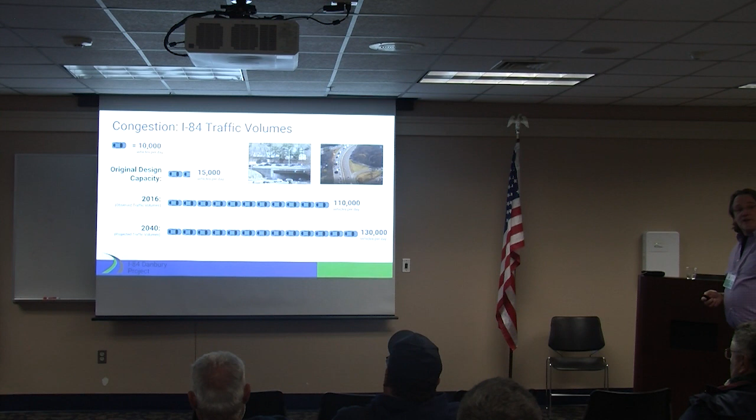The thing we want to point out is that in 2018, a needs and deficiencies report was completed that defined some of the issues on the I-84 corridor, and there's more than usual congestion. In fact, the original design capacity was for 15,000 vehicles per day. In 2016, there was 110,000, and in 2040 it's expected to be over 130,000 vehicles per day.

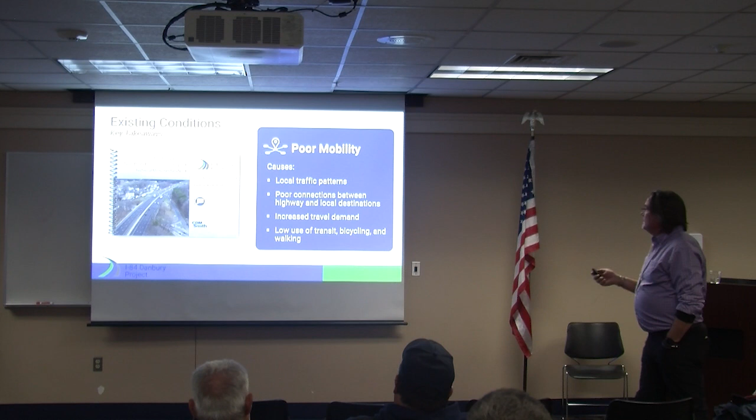So all of us who drive this kind of understand it's congestion. The needs and deficiencies report also pointed out that there's a lot of poor mobility, that's the movement of people and goods, especially poor connections between the highway and local destinations like the hospital or downtown. Those points were taken into consideration when the study began.

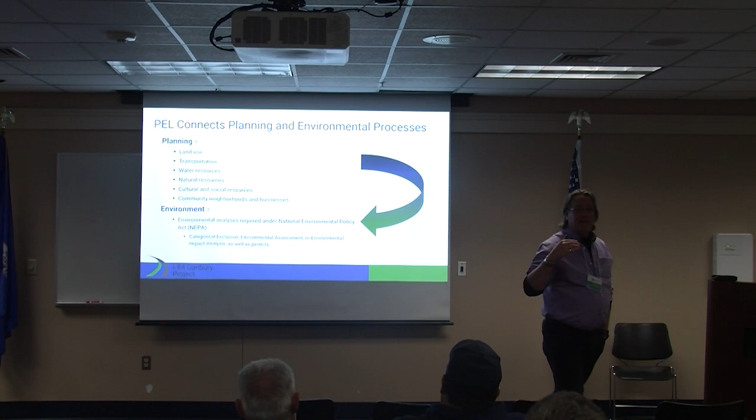PEL stands for Planning and Environment Linkages. It's intended to link all of the planning studies that have been done: land use planning, municipal and regional transportation plans, conservation plans, land and water use plans.

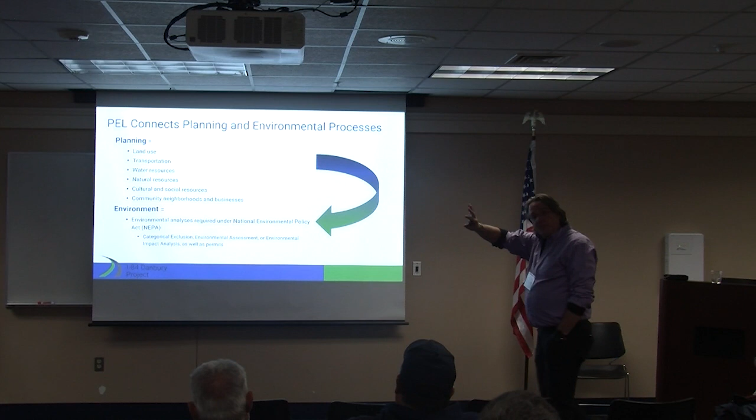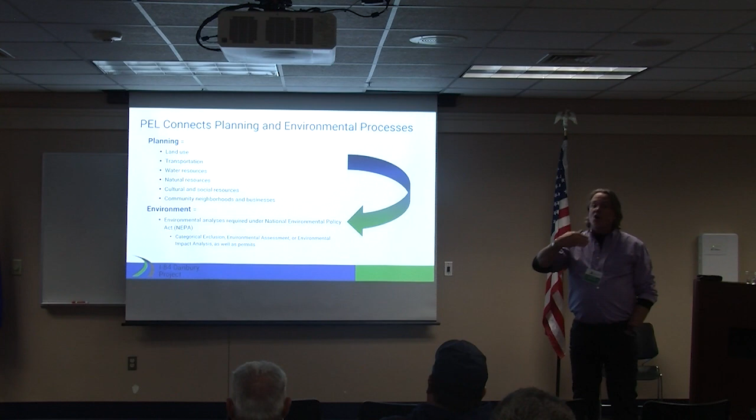All the planning that's been done is taken into account when it moves into a project-based study—this is not a project yet, this is a study—to take all of those planning issues and bring them forward into the National Environmental Policy Act, the more detailed environmental process, once we start a design process.

So this is based on the federal highways PEL process, and we've got a slide in the back showing that there's a lot of benefits to doing a PEL. The PEL will take all of these planning organizations and planning products and integrate them before it goes into the more detailed environmental analysis.

We've identified the transportation issues, needs and deficiencies, and prioritized what those issues are. Really, here is where we want your input. We're highlighting environmental and community concerns in order to create a roadmap to a project, and we hope these early action projects, these quick wins, these breakout projects can be implemented.

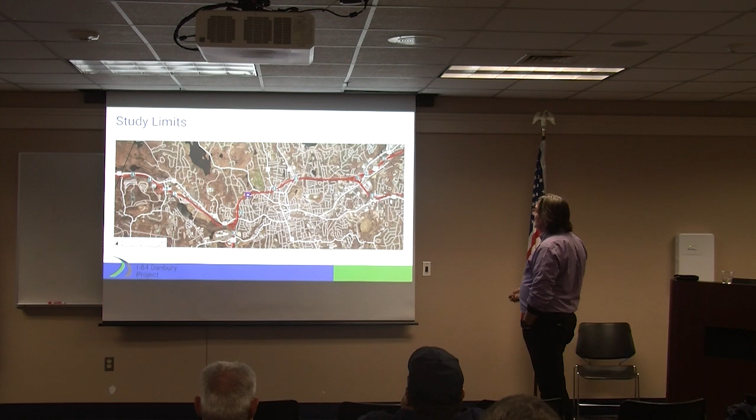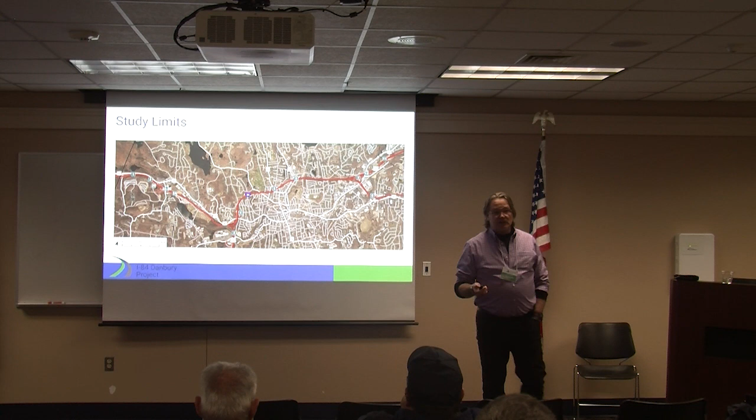Our study limits run from the New York border up to past exit 7 into 8. We know this whole corridor is very complex, with issues that are specific to localized areas, so we did not want to look at the whole thing as only one potential solution.

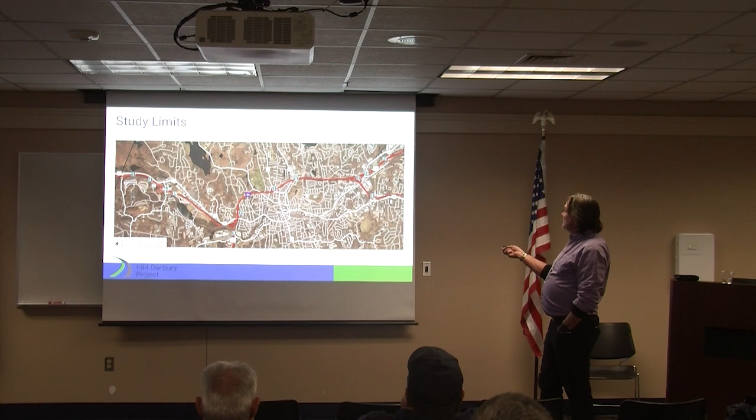We looked at the main line, which is why we broke it into segments. Over here in the west, where 7 comes in, there are very specific left-hand ramps and specific issues. In the center, there's access to and from I-84 from local roads, access to downtown Danbury, and access to the hospital. We've got places where we don't have complete interchanges—you can only get on in one direction.

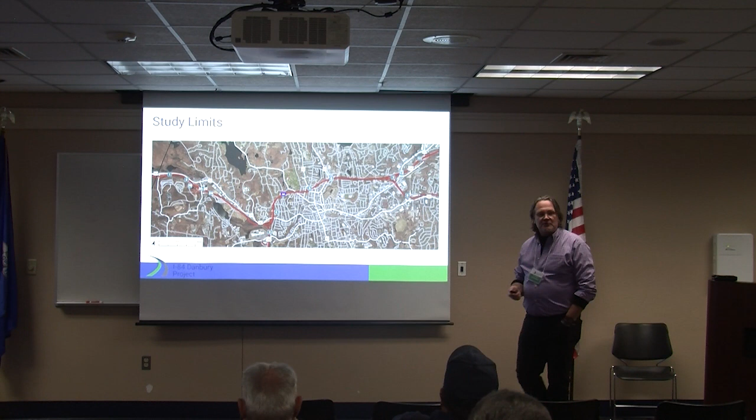So those are complex issues, and then we had another set of issues over here—the humpback or turtleback—as well as again the left-hand ramps where 7 comes in and out. Because of that analysis, we broke it into a mainline segment.

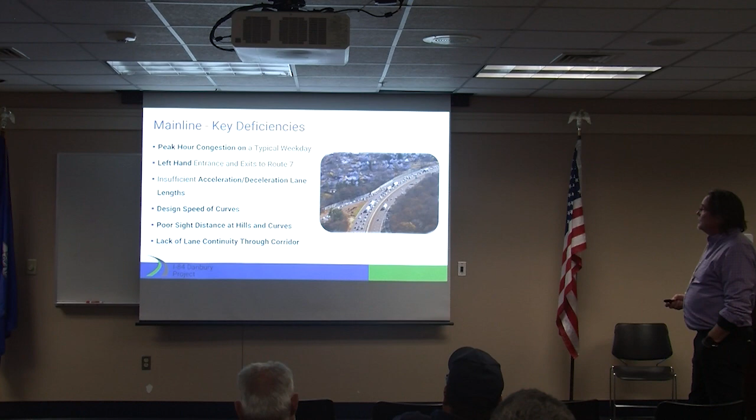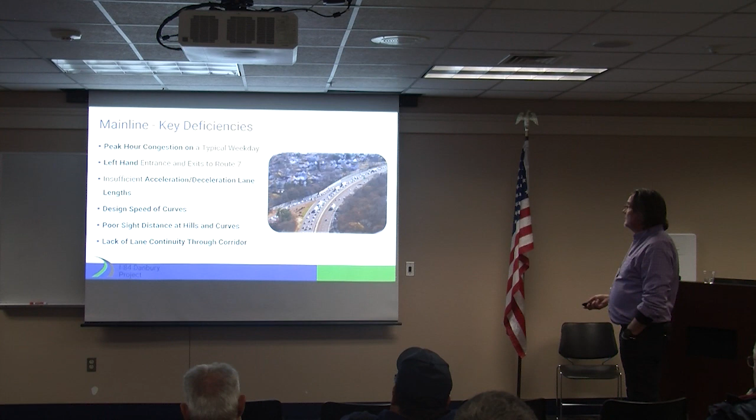The mainline segment has some very key deficiencies. We've got peak hour congestion, left-hand entrances and exits, a lot of very short throat acceleration and deceleration lanes, and curves that change our drive speed because they have a lower design speed than the straightaways. So we don't have consistency of traffic flow. We have poor sight distance at both hills and around curves that slow the traffic, and this lack of lane continuity through the entire corridor.

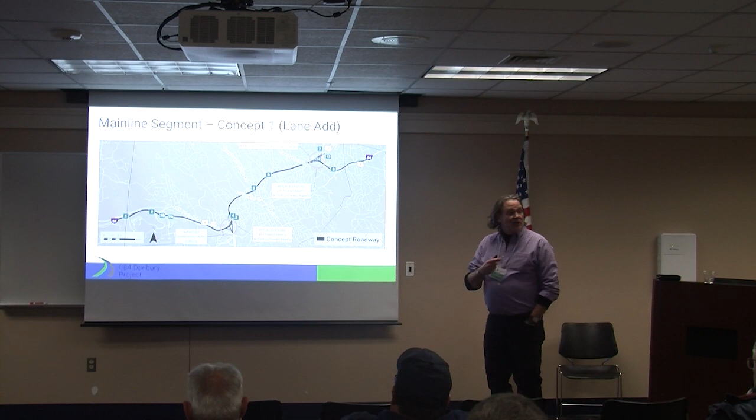So we're going to ask Sharat to explain some of the concepts that have been put forward to solve some of those key deficiencies. Thanks, Ray.

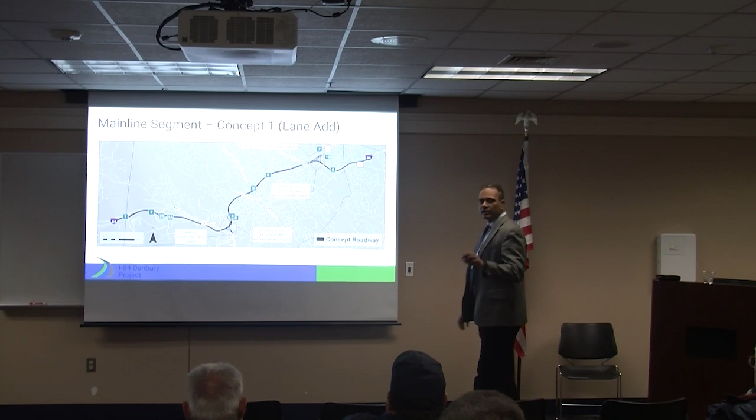If you went through the boards, there are three mainline concepts we're looking at. Concept one is the lane add, which provides an additional lane for the entire stretch from the New York line on 84 to exit 8. Wherever you see lanes adding or dropping, that would no longer be part of this concept—you would have 3 lanes continuously all the way to Hartford or all the way to New York. In some places you see exit-only coming up, and near exit 4 you see a lane drop happening when route 7 comes on. That's part of the lane add.

The other thing is the 84/7 interchanges. Those left-hand entrances and exits would be switched over to the right-hand side. So everyone wanting to go to Route 7 now would have to exit on the right side, not the left side. That eliminates a lot of what we call a weaving issue, where traffic is trying to cross and conflicting.

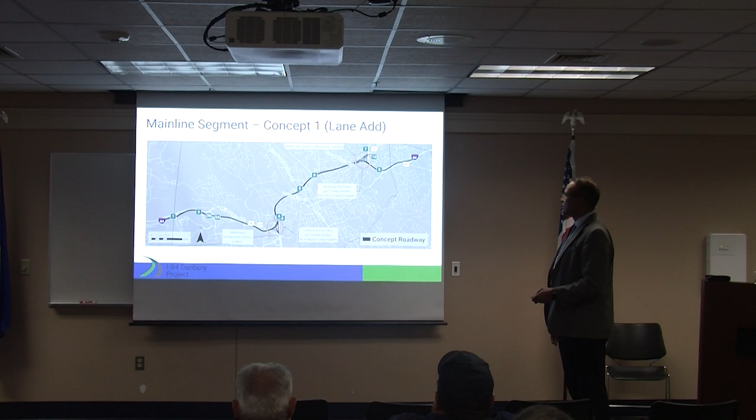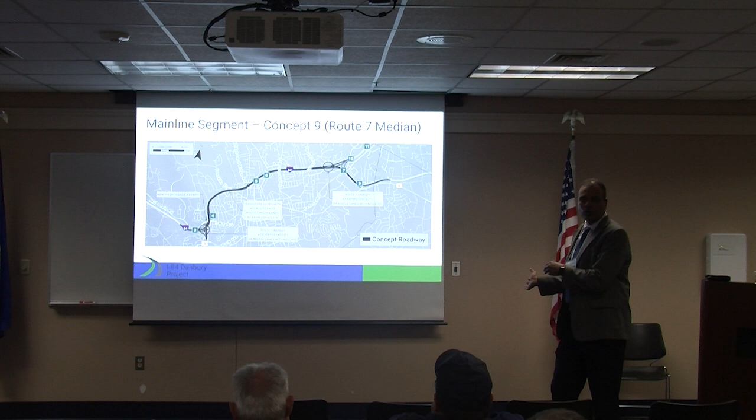So that's part of concept 1. The next one that was looked at was concept 9. I'm not sure how many of you went to the website, but this concept is similar to concept 1, except it looks at providing express access from 7 to 7. So we would put 7 in the median. There would be a flyover on 7 giving you the option of either staying on the right to exit to Lake Avenue or going to the downtown exits. If you miss that exit, you're all the way to exit 7. So basically it would be an express facility all the way towards New Milford and Brookfield. There's no way to get to a local exit then. So this is the concept for concept 9.

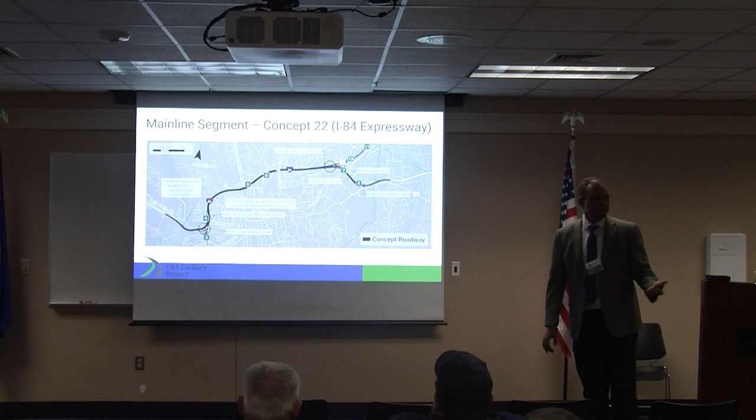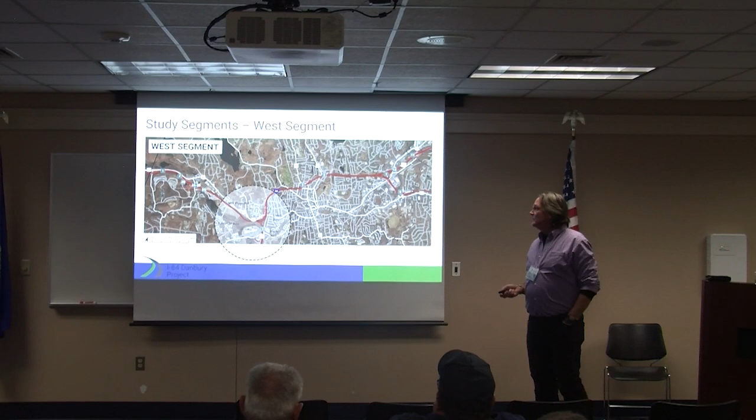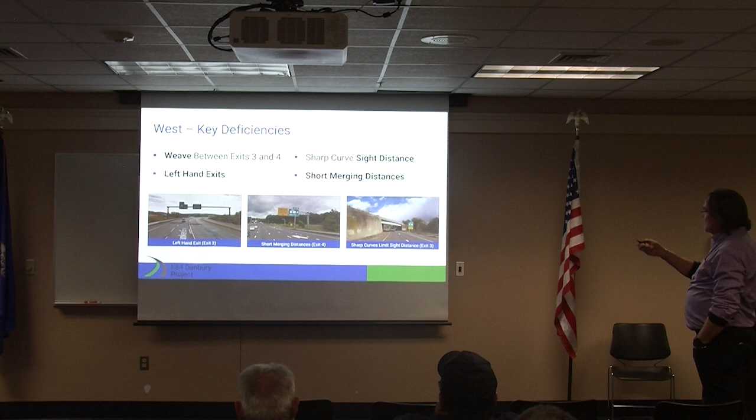So you can already get the idea of what we're doing. Now we'll look at the same kind of process for our west segment. Some of the key deficiencies again are those left-hand exits, the big weave that Sharat was talking about. If you have to move over 3 or 4 lanes to maintain your direction of flow, and somebody else is moving over 3 or 4 lanes the other direction, that's what we refer to as a weave. And throughout this area, we've got sharp curves and short merging distances.

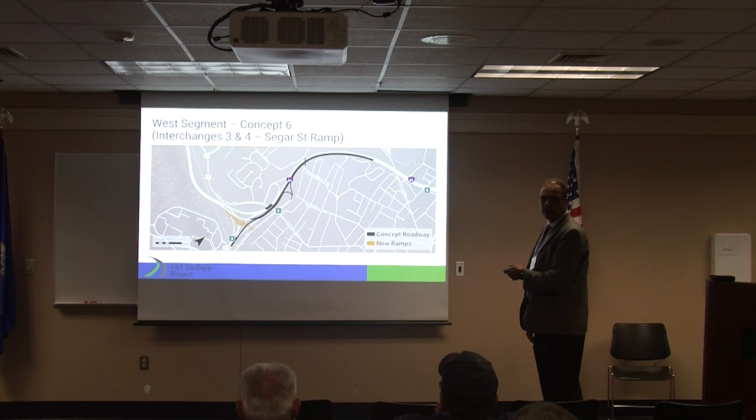So, two concepts in the west, called concept 6 and 12. Concept 6 is what we're calling the Segar Street ramp. This was looked at initially because 84 traffic wants to get to Lake Avenue, and you've probably seen this happen a lot where traffic just stops right at this ramp, especially because 7 traffic is coming on, trying to merge, while 84 traffic is trying to cut across to Lake Avenue. There's a mess here, backed up all the way down to the New York line. So the idea was to provide a ramp down to Segar, allowing 84 traffic to exit on Segar Street, with a barrier provided so 84 traffic no longer can take Lake Avenue. Only the 7 traffic that comes on can take Lake Avenue. So we split the Lake Avenue traffic between 84 and Segar Street. One of the other things we do here is put a little bit of a curve on 7 to slow it down as it comes in.

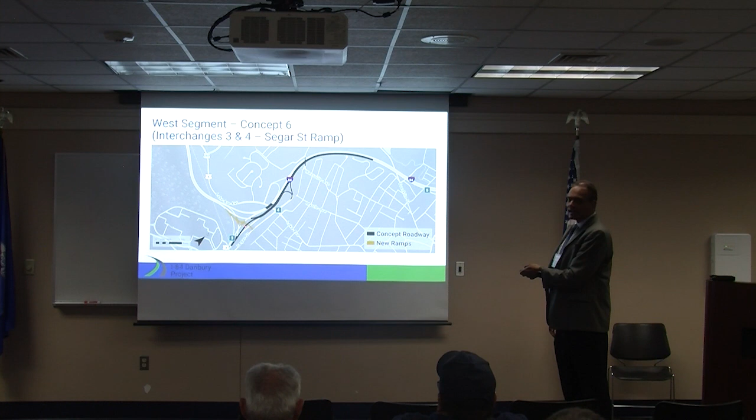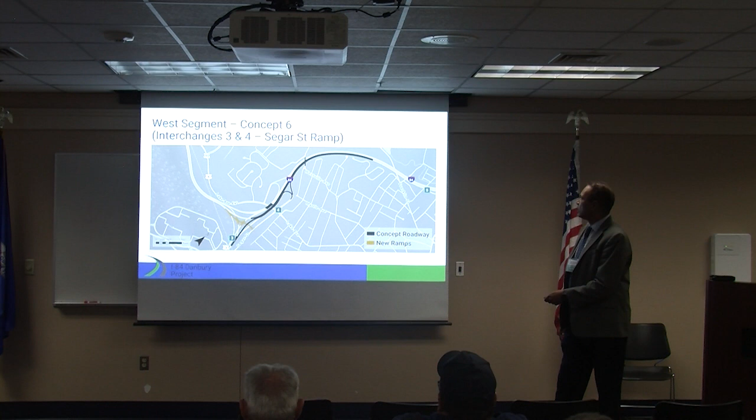If you travel it, 7 comes in at pretty high speed onto 84 today because it's got a straight shot, and you can see from this white line, which represents the existing 7. By doing this, we allow this merge to be much easier than today, and allow that 7 traffic to better mix with the ramp traffic. The other concept you looked at was concept 12. We don't do the Segar Street anymore, but anyone who wants to get to Lake Avenue, we put them on this green road called the CD road.

You probably got fed up hearing about CD road, but it's essentially a roadway that parallels a highway, an express facility. We put traffic there, and that's where 7 traffic would come in, creating some conflicts with that and Lake Avenue traffic. But 84 wouldn't have issues because 84 traffic going to Lake Avenue would be on this green road, not trying to cut across to Lake Avenue.

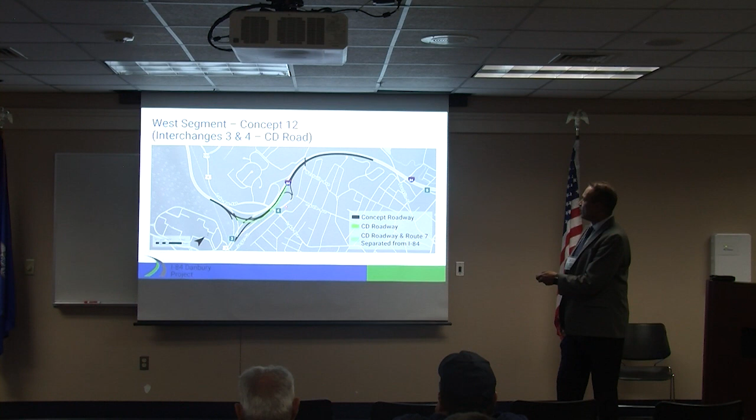So those are the two that are in play, mainly looked at on the west side to address the issue between 3 and 4. Keep in mind, as part of concept 1, 9 and 22, the left-hand to right-hand ramps are part of that larger project, so in these smaller interchange area concepts, we're not looking at switching ramps.

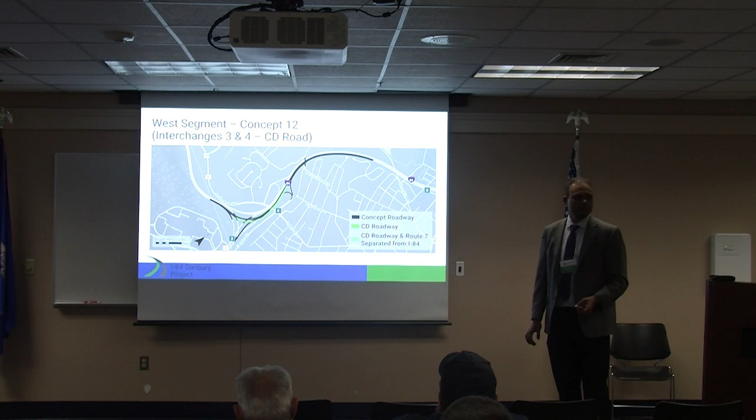They're already part of the larger lane add option. To clarify, since you'll hear the word CD again, it stands for collector distributor. So you have mainline traffic flowing through, and an adjacent highway that takes all the on-ramps and off-ramps, collecting and distributing all the traffic, which then eventually joins back in.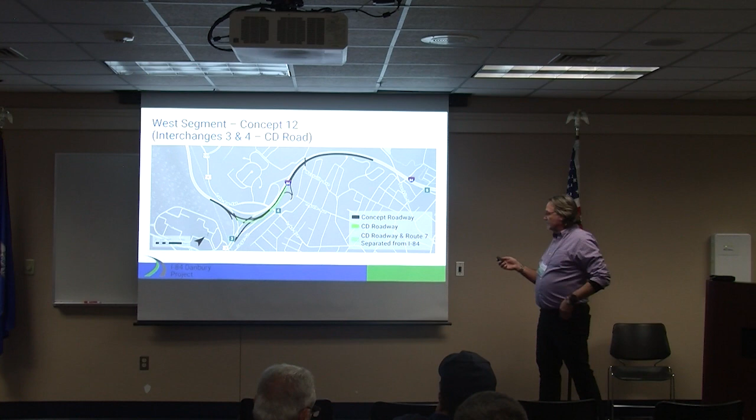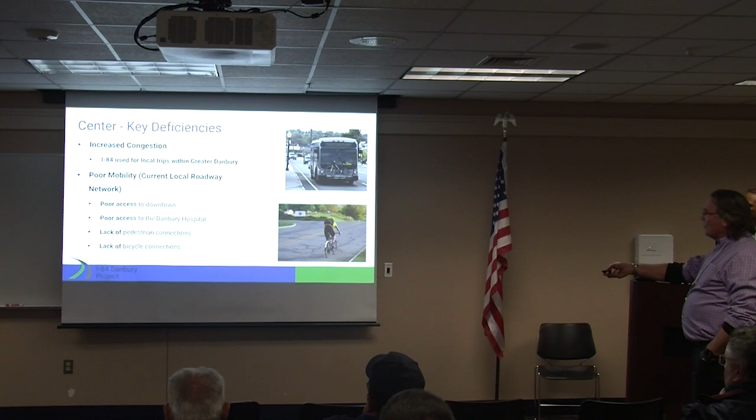It's meant to take all of those on and off-ramps off the main line. Then we also have the center segment, and the main deficiencies were more about increased congestion—there's still congestion throughout the center section—but a lot of it was poor mobility, poor access to local roadways, and poor access to downtown and destination locations like Danbury Hospital.

So Center had 4 concepts, and I'm not sure if you've seen all four concepts. There are several concepts that were not moved forward, and there's a board here showing which ones will move forward. But this one is called the Hospital Access Tamarack Avenue.

When we started the study, there were a few concerns from stakeholders looking at the needs and deficiencies—poor connection to downtown, poor connection to the hospital. So a lot of these concepts were looking at addressing hospital access and downtown access. Many of you know that exit 6 today is a partial interchange—you can only exit or enter from the east. You cannot get to North Street to and from the west.

So the whole idea was to create a new interchange here at Tamarack Avenue, which would be a full interchange. The issue is obviously North Street—these existing ramps would have to be removed. Anyone who wants to use North Street would have to use Hayestown or other ways to get there. That's a downside, but it certainly provides a direct connection to the hospital campus.

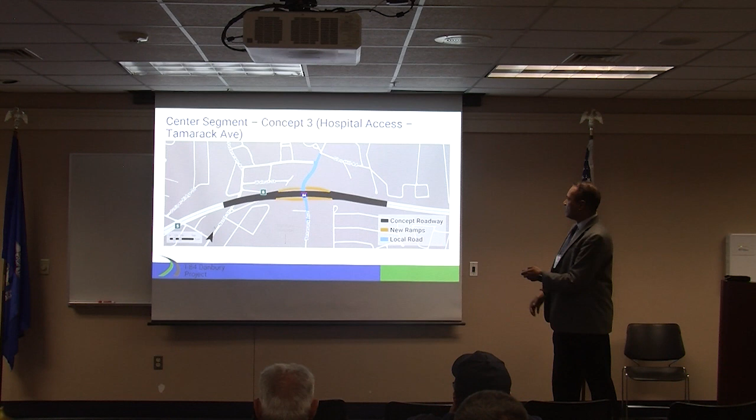Concept 13 was looked at as something that could be done probably sooner and easier—leave the existing ramps on North Street, but provide a new ramp going to and from the west at Great Plain. This would provide that connection to the hospital through Great Plain, since Great Plain turns into Locust, which goes into the hospital. So that was also looked at: keep the existing exit 6 ramp, provide new ramps at Great Plain.

The only downside is you split the two entrances—you basically have one side on North Street, the other side on Great Plain. A lot of drivers don't recognize that, and it creates confusion.

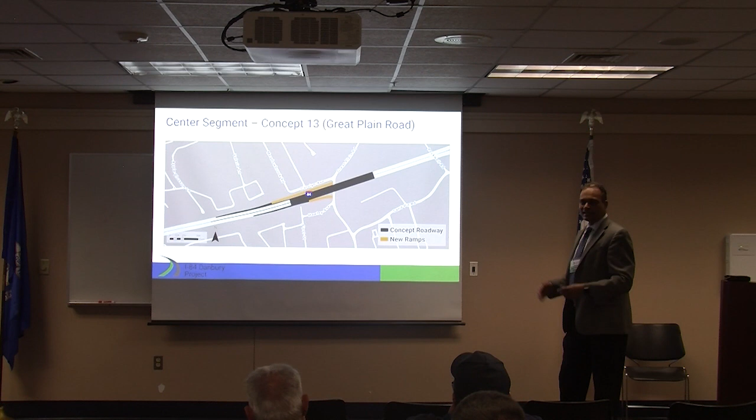Concept 16, probably the most impactful of the four, was to look at providing that ramp from North Street somehow. Here in green, going back to that CD road concept, it would be a very short spur on both the north and south sides, connecting North and Tamarack. The idea would be to pull traffic from both roads onto the CD road, which would then feed the ramps going in each direction.

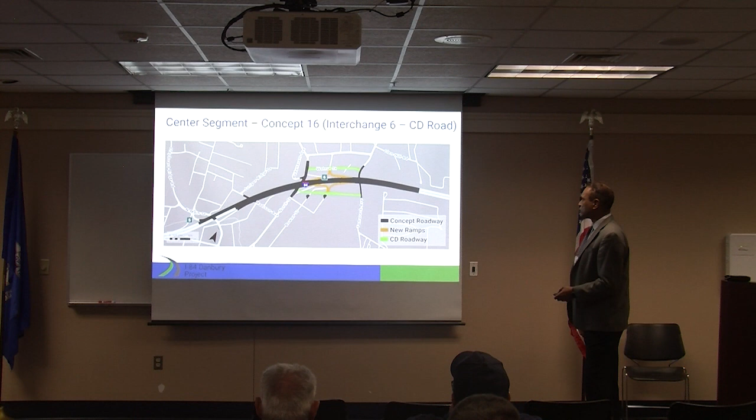The south side creates a lot more impacts—that's Wooster Cemetery here, kind of their property, so this road would tie in there. There are more impacts with these ramps being quite short because they're very close to the highway, so this had a bit more impact. Then concept 26 was the last, numbered from the sequence, and this came about through more discussions with the city to provide a full connection on North Street, full access to North Street.

So in the westbound direction, this ramp would be the new ramp added to get onto 84, allowing traffic from North Street to access it. Eastbound, we could not put the on-ramp from Main Street and the off-ramp to North Street close to each other, so we created this green road, called the CD road. You'll still be able to use the CD road to get to North Street, but it won't be a direct connection from 84.

So now we are providing a full connection at North Street, which is more favorable to businesses and direct access. People use North Street quite a bit. The only concern is that the interchange gets very close to Main and North Street. This is the reason why for so many years you never saw an on and off ramp at North Street - because of the proximity.

Again, this is one of the things we are evaluating as part of all four concepts and looking at how they work against each other.

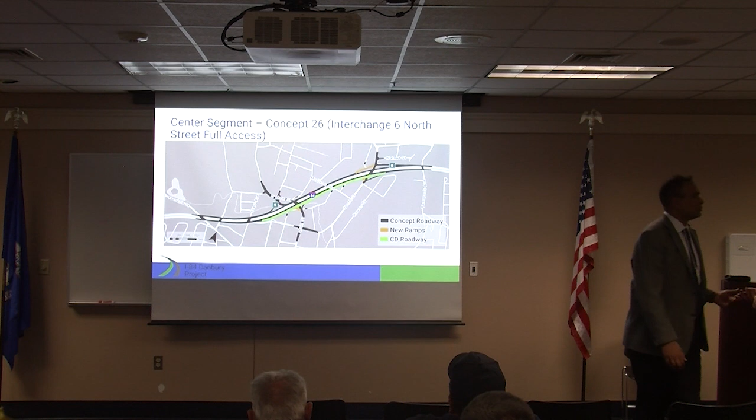So now we're going to look at the east segment. We can see there were weaves between the two exits and the left-hand exits. So we are looking at potential concepts to solve some of those problems.

Two concepts on the east, number 14 and 15, happen to be back to back. Here we're trying to do a couple of things. We've already switched the ramps in the main line concept on the right side. As you're going eastbound on 84 today, you make an exit to your left to go to 7 north. This way we put the exit on the right. You take this CD road, and there would be a slip ramp to go to 7 north.

You can stay on this green road and get off at Newtown Road - you never have to get back onto 84 to reach Newtown Road. Once you make that exit, you're going to Newtown Road. You also have the option to go back on 84 if you need to, via a small slip ramp here.

The other problem today is the 7 south traffic that wants to get to Newtown Road, because Federal Road, as most of you know, is too dangerous. So what we did is pull that ramp onto the right side, put it on the green road, and then they would be able to get to Newtown Road, or if they want to get to 7 from 84, they could use the slip ramp to get back on eastbound.

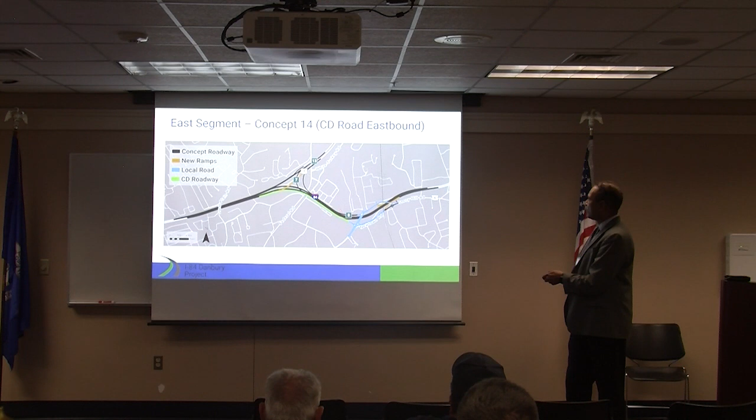If you want to get to 84, you can stay on the CD road, and that CD road would tie back onto 84 here. So the benefit of 15 is what you don't see in 14 is this so-called crisscrossing of traffic that happens a lot in 14. We would get rid of that in 15, because 84 here in the westbound direction also doesn't have that anymore, because all of that crisscrossing is going on that CD road.

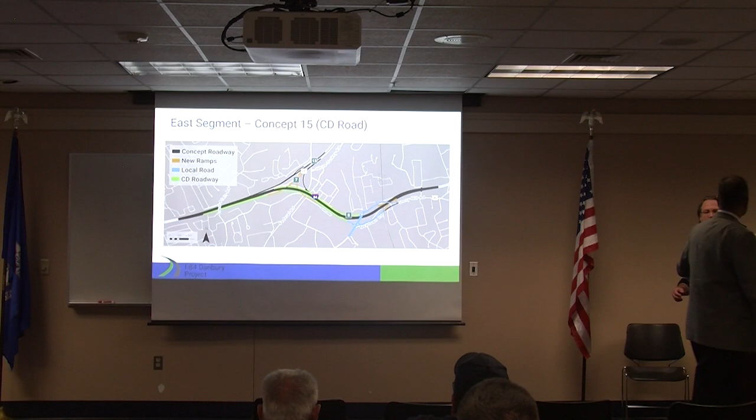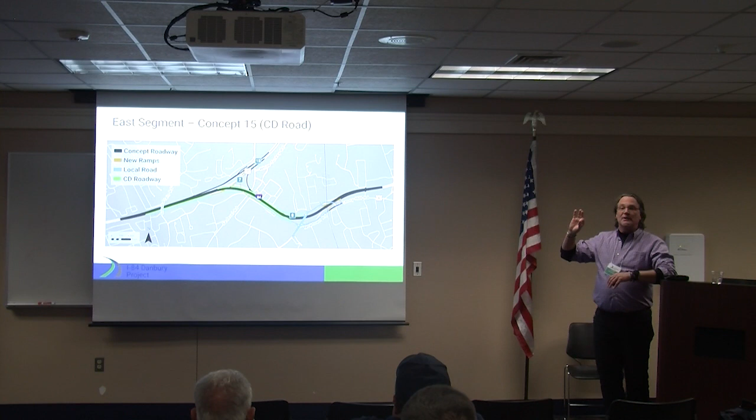So we want Sharat to continue on here, but I'd like to take a pause for a second and remind us that we're at this conceptual study level with these concepts that have been brought forward and vetted and designed to a degree that we can see if they function or not. And then we're trying to figure out which of these concepts, by segment, have a better use, solve the congestion and mobility problems better, or have less impact to the built or natural communities, right? So that's kind of where we're going. But these are just the potential highway options that we've presented so far.

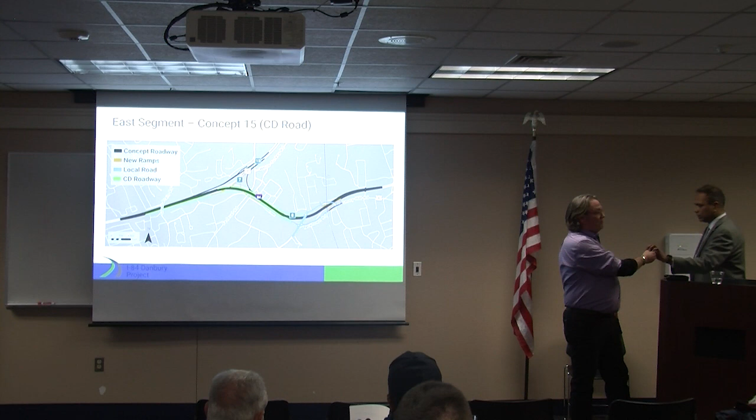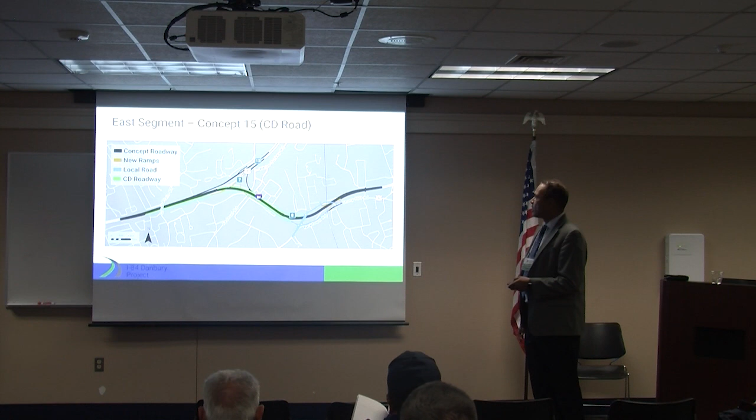Sharat, I'm going to ask you to continue on with your dynamic lane use and some of those. Sure, but I want everybody to realize where we are in the study and keep that in mind. So some of these that you're seeing here are kind of more long-term, larger projects, requiring a lot more design and planning work. So what we started to look at are some of the things that could be implemented on a much shorter term, what's called dynamic lane use.

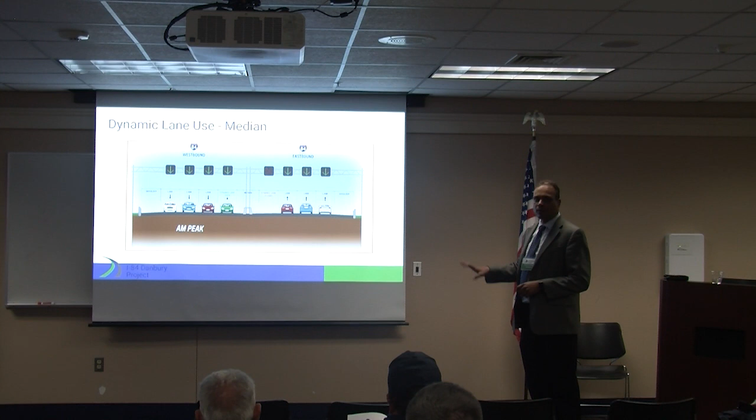And some of you, I know, visited this board here. So the idea, I go back to the Tappan Zee example, because most of you have probably driven the Tappan Zee. It's not exactly like Tappan Zee, but the concept is similar to it. They kind of use this in the Midwest quite a bit. So the idea here is to maximize the existing roadway that's available, maximize the width of the roadway in each direction that's available for travel. How can we fit an additional lane without having to widen? We may have to widen, but we're still investigating it.

The idea is to get a 4th lane on the left side. So the left shoulder today is about 10 feet wide. We certainly couldn't get a full lane in there, because we've got to keep a certain amount of shoulder. We would try to work with the existing lanes, try to get at least a 2-foot shoulder, and put a lane in there. The issue, and we get this question all the time, is: oh, you're already adding a 4th lane, why don't you keep it 24/7? The problem is we have a 2-foot shoulder. It's not great, especially during times when you have an accident or any kind of issue, or even maintenance is a big concern.

I know we talked to the gentleman in the back about snow removal, taking debris out, things like that. Certainly that lane would only be used in times when it's needed. So in this case, in the morning, for example, we would be using the lane in the direction that it's needed, which is going into New York. In the evening, we would be using it in the eastbound direction, coming in towards Hartford. In the middle of the day, that lane would be shut because we really don't need it.

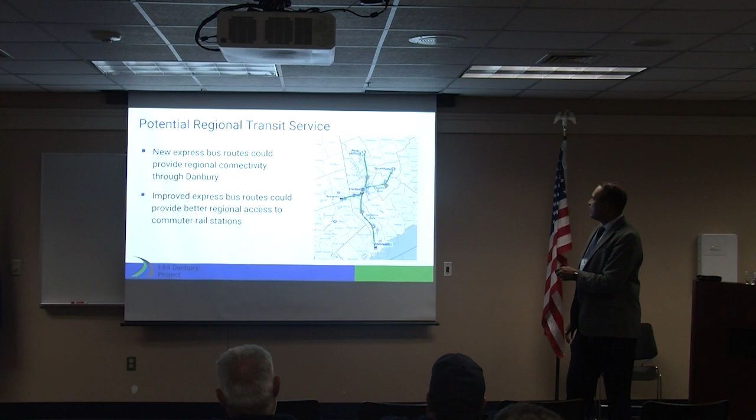One of the things we looked at was a high-level transit analysis, and we noticed that a lot of the people within the Danbury area who use 84 are living within this orange belt, as far as Southbury to the east and New Milford to the north, with New Milford folks mainly going to New York, Brewster, or Norwalk.

Southbury folks are going to Brewster. In fact, there are a lot of people who live in Southbury who take a bus sometimes to go to Brewster, get on the Harlem line, and get to New York. They don't want to go to Norwalk, they go to Brewster.

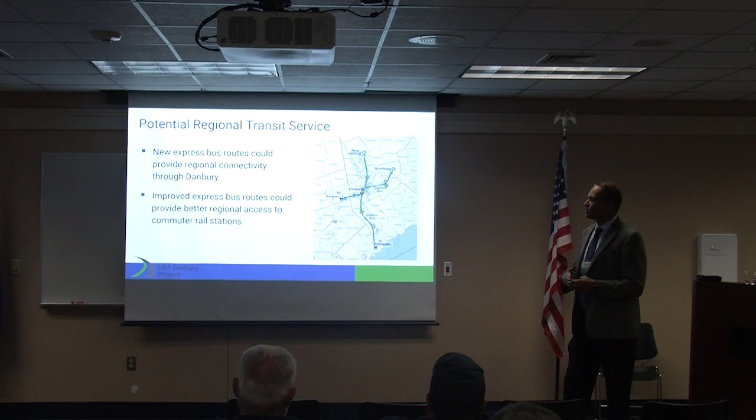So establishing these regional connections certainly would give us an additional mobility option. It wouldn't take a bunch of people off the highway, but it gives them an opportunity to use the bus, an express bus that would get them to Brewster, or connect to Norwalk. These are opportunities that need to be studied further and documented as part of the PEL process, to show there are options available on a regional basis.

In addition, we feel there need to be some potential changes made to the local service. There's a lot of buses now that HART operates that do a great job trying to connect as much as possible between different services. Most of these buses come to one location today, downtown near Kennedy Park, and you kind of have to switch over. There's a pulse point there.

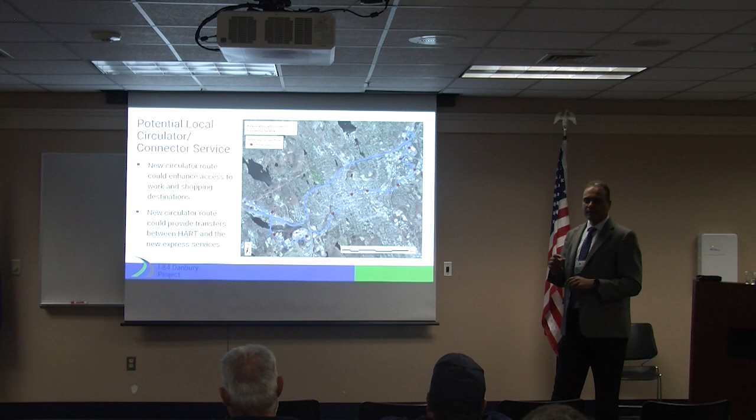They're trying to move that pulse point to the rail station. This circulator service would give people the opportunity to not use a connection that requires switching over or transferring. It would allow them to go from east to west. So if you're living in Brookfield, like in the Federal Road area, and want to get to the mall, you could use this service without transferring or waiting for the next bus.

You can also stop at one of the pulse points and then switch over to another bus. A little bit more service planning needs to be done, but it's an idea of how people could transfer between local service, or even transfer between this and the express service shown in the previous slide. This would have to be worked out in more detail in terms of exact timings and frequencies of the buses.

In addition to the bus, most of you have probably heard about the Danbury line, Danbury to Brewster line, which is the existing rail bed owned by the Housatonic Railroad. Putnam County did a study to look at that potential connection to provide a 10 to 12 minute service from Danbury to Brewster, mainly because a lot of folks take their single-occupant cars to drive over to the Harlem line, park at Harlem line stations where there's not enough parking, and try to get to the Harlem line to reach New York City.

So the idea here is to look at this rail connection to see if there's a way, without having them switch trains in Brewster, to have this train make a U-turn and go all the way down to New York City as a potential option. This is something that's being studied already as part of that other project. We wanted to recognize that this is something in play that's being looked at by both Danbury and Putnam County. What's the status of that?

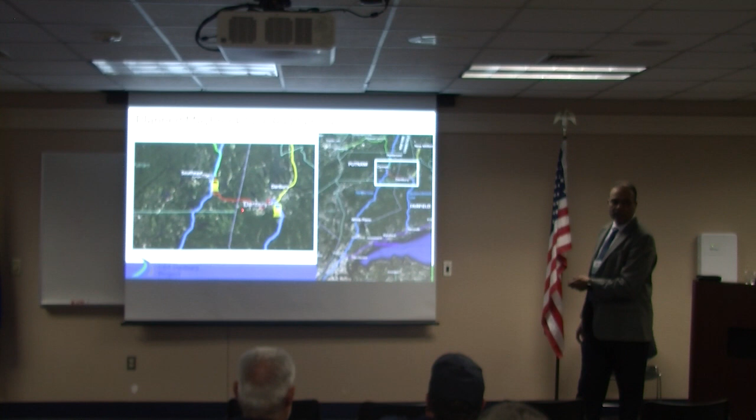And I think they're introducing two additional stations between Danbury and Brewster on the Connecticut side, so there'll be two stops before they get to the city. I think there's one near River Street, exit 1, where there's a condo complex, and there's one near where Union Carbide used to be—Rivington. So there are two stops there.

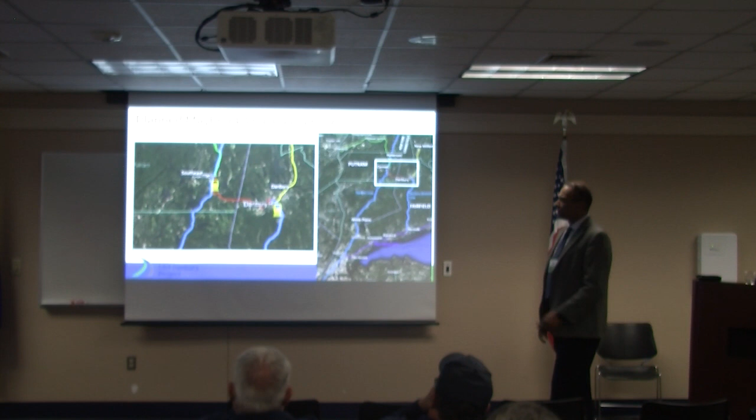And then in addition to the transit, we also looked at—this is hard to see—we went from the New York line all the way to exit 8 and started to explore opportunities where bicycles could be accommodated. Certainly right now, if you look at any of the streets in Danbury, there's probably very low bicyclist use. A lot of that is because of the grade and terrain, and a lot is because of traffic volume, especially downtown on Main Street and North Street, where it's very hard to ride your bike with the north-south volumes.

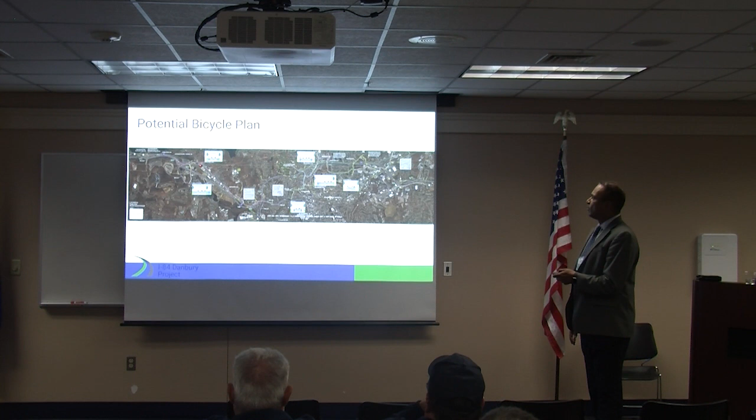But there are some ideas for how bicycle facilities could be accommodated. We don't see all of these coming up at the same time, but these are ideas that could be more improvised—maybe a small spur starts and then the next one. The city is also looking at potential trail connections which are off-road, and those could be implemented probably much quicker since there's more offline work involved. The trail connections would tie in well with any on-road bicycle facility. So this is something we've given the city for review, and we'll be incorporating some of these ideas into the PEL report as part of our study.

In addition to some of the projects like the lane use I talked about, the department is currently looking at installing cameras along 84, like you probably see on 95. There will be cameras you can log onto the DOT website and see traffic conditions and things like that. They're also going to install what's called variable message signs—the VMS signs, large signs that would tell you Hartford 30 miles, 20 minutes, or 25 minutes, giving more driver information. That's part of a program the department is already moving forward with.

We're also working with the city on looking at some of the traffic lights to see if they could be better timed, in some of these places where the traffic backs up quite a bit.

The city has a plan to look at something on Main Street and Down Street, potentially converting Down Street to one-way. So there's some ideas at the local level that we're working with the city on, and we talked about that exit 8 area with the diverging diamond, the ramp on the left side.

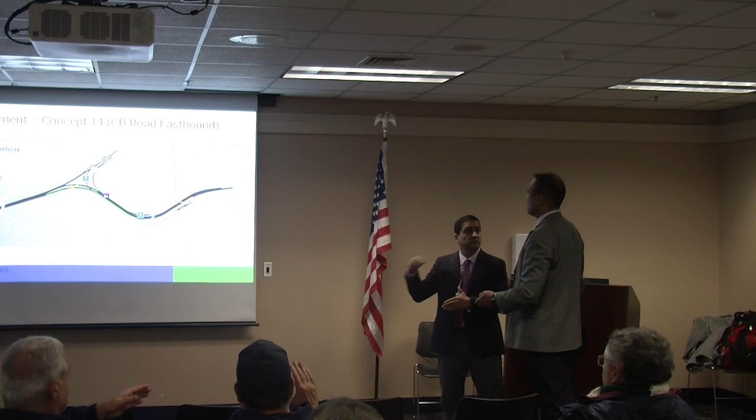Did any of these concepts address the eastbound exit 5, going down the street over to Clapboard Ridge Road? I don't know if I saw any of these. Not direct, I mean concept 26, which the city recommended, had... are you talking eastbound exit 5? Exit 5 eastbound, going down to the traffic light at Main Street, making a left to go up Clapboard Ridge Road. Yeah, so this is the only one that looks a little bit more like it.

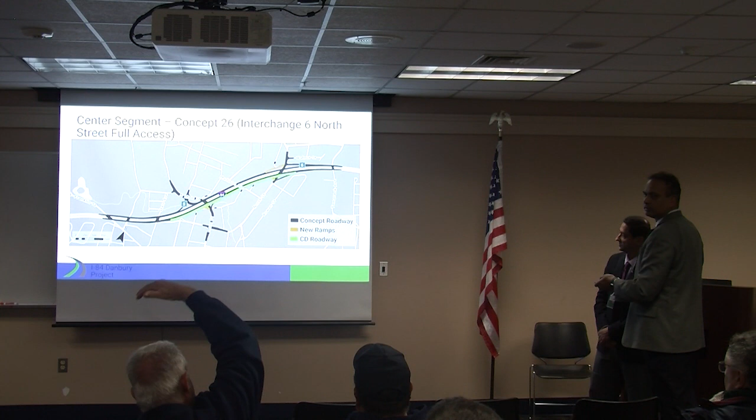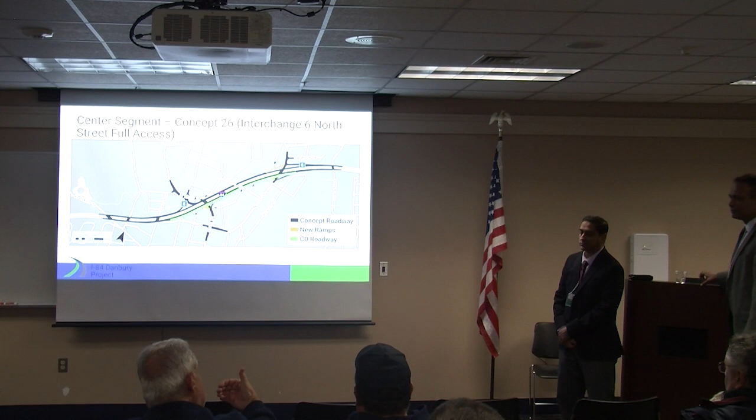So there's the city, no exit 5 with a ramp going across the highway right there to Clapboard Ridge, without avoiding going down to Main Street. Yeah, so you'd still have the westbound access though. He's talking about eastbound. Eastbound, yeah, because all the traffic going to North Street gets off at 5, all the traffic going up Clapboard Ridge Road gets off at 5, and they have to go down to Main Street, make a left, to go underneath the highway. That would be the same case in all of them. Okay, there's no flyovers or anything. No, the problem is we can't grade separate here because the elevations don't work well to allow that to happen. He's talking about getting to Clapboard Ridge, you have to make a left whether you make it here or there. A lot of people get off exit 5 there, and a lot of people from Fairfield make that left out to North Main Street, go up Clapboard Ridge, or they go up Golden Hill, and it goes over to 39, because you don't have a ramp here now. You don't have the eastbound ramp here, right? They use this and kind of go up this way.

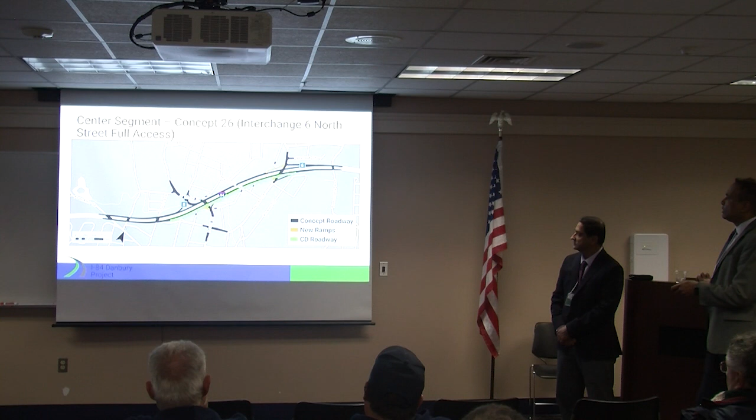If you add this North Street connection, a lot of those people who go through Golden Hill and then off have right to there too. Is that off over right there? Yeah, up north, so.

That was a concern the city voiced, in terms of Golden Hill, about Downs Street, possibly making it a one-way going down only. Yeah, so there's some ideas the city had in terms of making this piece of Downs one-way, because the other direction doesn't have a lot of traffic.

Going up the hill around the circle? Yeah, basically, if you have this ramp, you would just make this one-way all the way up to Main. Most people would hate that, you know, one-way traffic.

3 lanes? There's not a lot. You could still get up there, there's other streets here, you could get up. There's not an issue that way. But it takes away a lot of pressure on this traffic light.

We also got consensus with the city about 2 lanes turn left and 2 lanes. That's one of the intersections that we're gonna look at, maybe even as a breakout, try and improve that, so you get some temporary benefit, at least in this area.

They also talked about the sight line as you come down Main Street, you can't see the cemetery, because there's a wall around that corner. So that's something that we're gonna look at, whether there's a quick fix for the alignment, the stopping, the traffic light. Yeah, I know. You had a question?

Supervisor, so if you do the short-term dynamic lane proposal, wouldn't that exacerbate the problems of this crossover traffic even more? I mean, now you have 4 lanes, but you still have all of this crisscross traffic at exit 4. The signage would really have to be clear in terms of that.

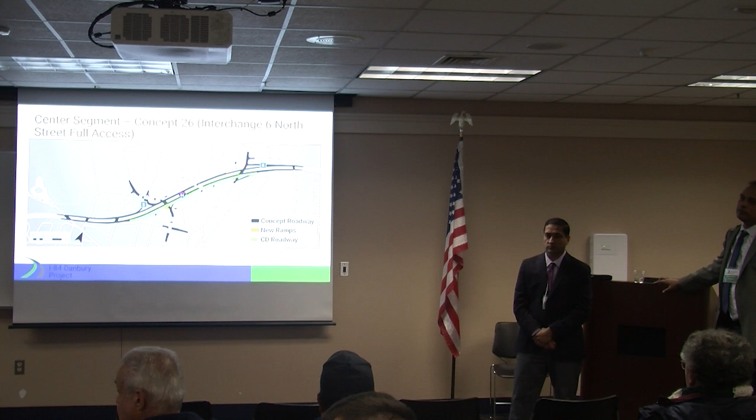And I'm just wondering how much actual, like, data-driven is this? Like, how many studies have gone into it to see where is the actual traffic, like, from Route 7, where do they wind up? Are they getting off exit 5, are they getting off exit 7? Are you actually tracking where the cars are going?

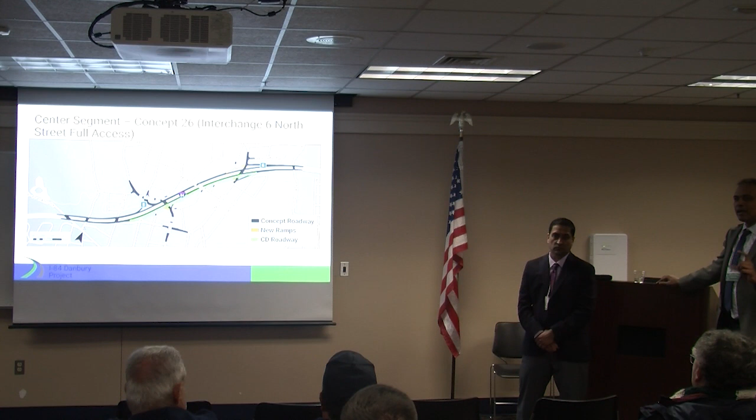Yeah, so we did an extensive data collection program back in '16, before COVID. We collected traffic volumes all through the corridor. We also looked at what's called origin destination, where people on 84 are coming from. We found that a third of the traffic on 84 is local traffic, people who live in Danbury and just use 84 to get around town. We found 7-to-7 traffic is about a third, and the 84-to-84 traffic is about 40% roughly. So there's an equal balance of those movements happening between 84-to-local and 7-to-7.

So certainly that was part of a lot of decisions you've been looking at, in terms of the whole collector-distributor road idea, was essentially to pull some of that local traffic onto that collector-distributor road, so we don't have to put the traffic on the main line. They should be on that collector-distributor road trying to get to a local road. So a lot of this analysis was based upon that data and trying to understand patterns of how people travel.

But even adding a CD road is not gonna take over additional land, you're gonna do it within the confines of where it is right now? No, basically this CD road, for example, we haven't really figured out how this would be in terms of elevation, but it's going to be pretty close butting against. We have retaining walls, which basically would not create property impact. So certainly we know this is a built-up neighborhood.

Concerns about that—this is one of the concepts, so we have 3 other concepts being looked at. Everything is going to be compared against each other to see how this fares against the other concepts. That's part of our evaluation: if we have 4 concepts that all perform similarly in terms of traffic, we start looking at how many impacts one has versus the other. Just hypothetically, if one option impacted 25 properties, and another alternative worked just as well but only impacted 2 or 3 properties, that's one of the considerations we'll be looking at.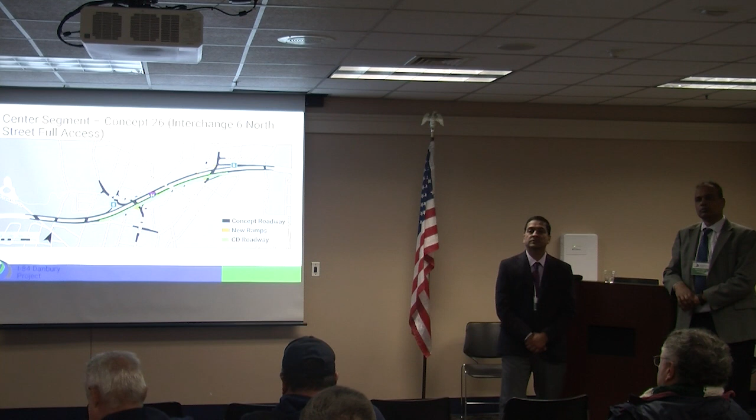Still disappointed that concept 10 wasn't part of the presentation.

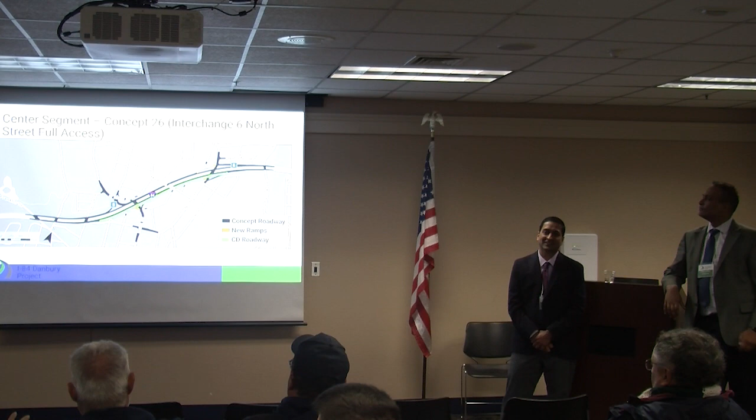For the exit 3, exit 4 area—one thought, I remember way back when there used to be an actual exit onto Kenosia Avenue, it was exit 2 back then. Was that considered, to perhaps bring that back to help relieve some of the volume going to either the mall area or to that part of Mill Plain Road?

So keeping the existing exit pointing out where it was, exactly where it was. To the west. You'd have to show it on the Kenosia map. The button wouldn't be on there yet. Maybe concept 1. Your left button will go back one. Use the right one. There you go. And the center one, oh, or you can turn it off. Thank you very much, good night.

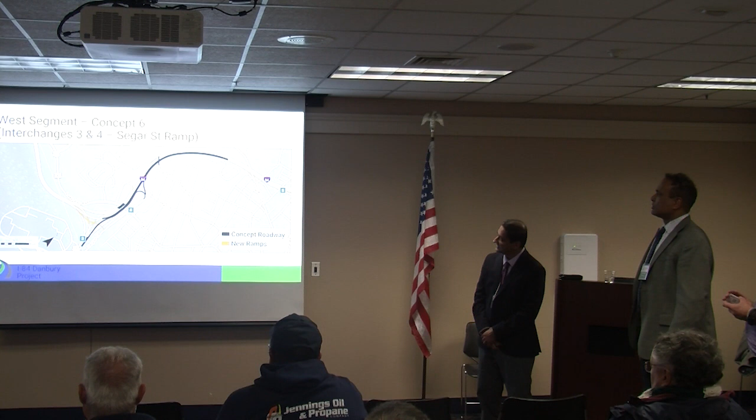Right, here was the exit. It would be further down, at the intersection of Kenosia. Here's the railroad track, further to the west. Further west, yes—here's the railroad tracks, and it came right up here, and it's all wetlands again, and went over to the mall right here—this is the mall. So it's back at the mall entrance. It would be further west, right here. I think Kenosia is further to the west, right?

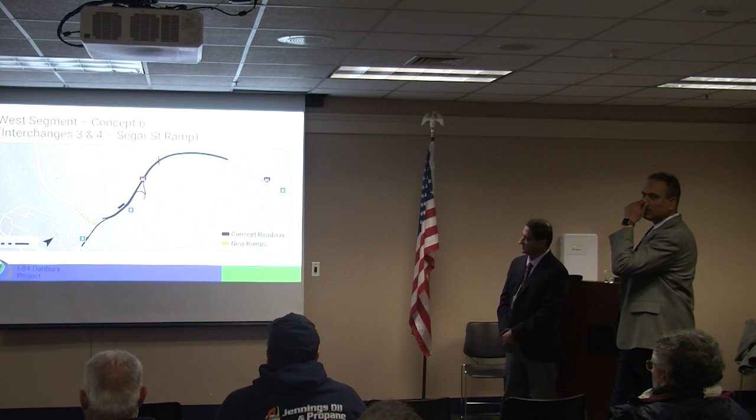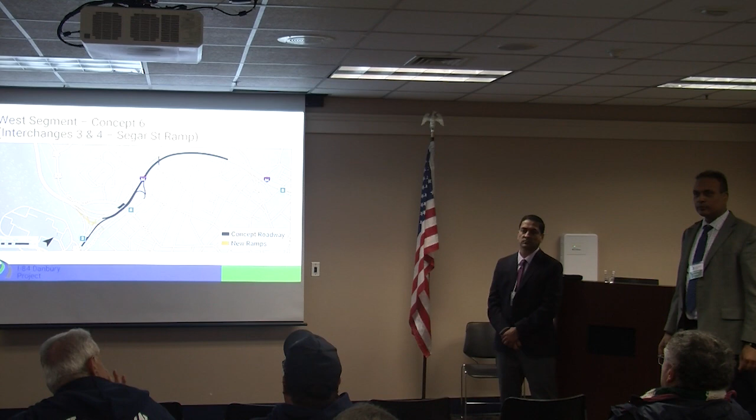It is, yeah. The issue I can see is that exit 2, Old Ridgebury Road, is very close to that Kenosia exit. Exit 2, Old Ridgebury Road exit—yes, I think it's very close. Not really, there used to be an existing one there. It was actually, way back when, exit 2. So you're talking about—that's a better map. When Union Carbide came in, they changed that all around, and that's where they put that exit 2 in. This is Kenosia—it actually used to be an exit that people used to go to the fair.

Yep, exactly. So I think, for whatever reason, a lot of the infrastructure is still there actually. You could resurrect that and maybe help use it for some of the volume going to the mall area, and also make a left onto that part of Mill Plain Road. Especially if you're considering that Segar Street exit, right? Because that Segar Street exit may help people go back into where exit 4 is. But there's a whole other part of Mill Plain Road that's getting congested enough as it is, which could probably use some help.

Yeah, we will have to look at this Kenosia exit, because we did not see any studies looking at this one per se. One concern would be that this kind of splits the exit, right in the middle of the two—we'd need to see how this works. This would basically put more pressure on Kenosia and Backus and everything else as you go into the backside of the mall. You see Johnson Trail Park right there, about two acres, and you're crossing a bunch of wetlands going into the mall area. And there's a cemetery on this side of Kenosia too.

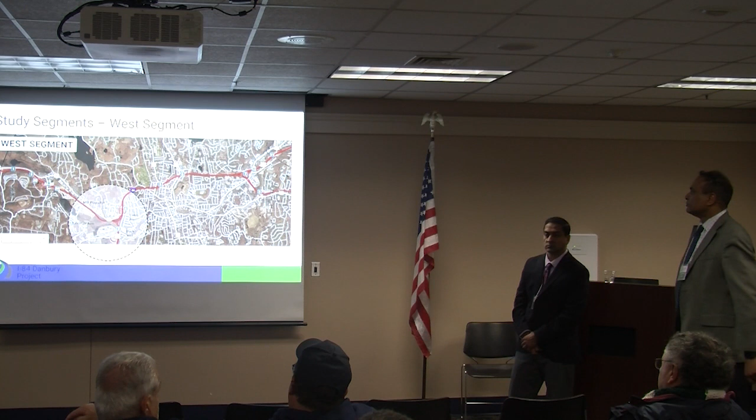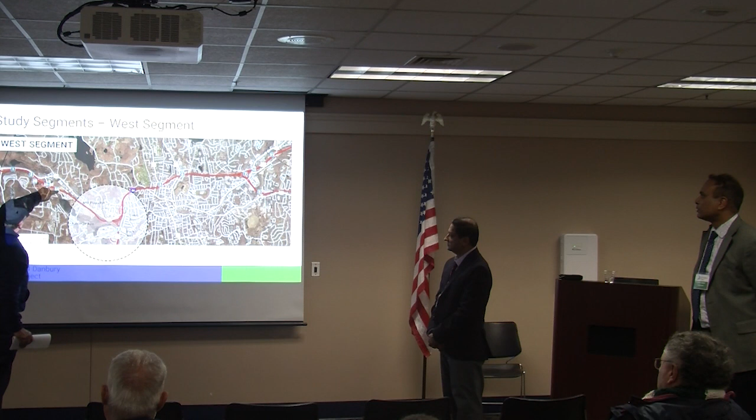You can see the roads there, those used to be part of the on and off ramp. This used to be the off ramp right here. No, it was Kenosia. Kenosia is right here. Yeah, that's where it was. It came right off of here, and it connected to here.

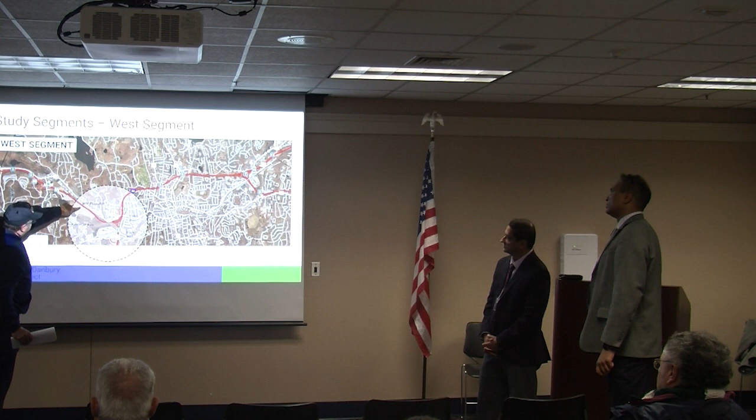Because the people going to the mall, they came up here, the eastbound traffic came up here, right there. So when they built Union Carbide, which is here, they redid this whole part. So a lot of people are going all the way down to exit 4 to get off in here, and exit 3 to get to this side of town.

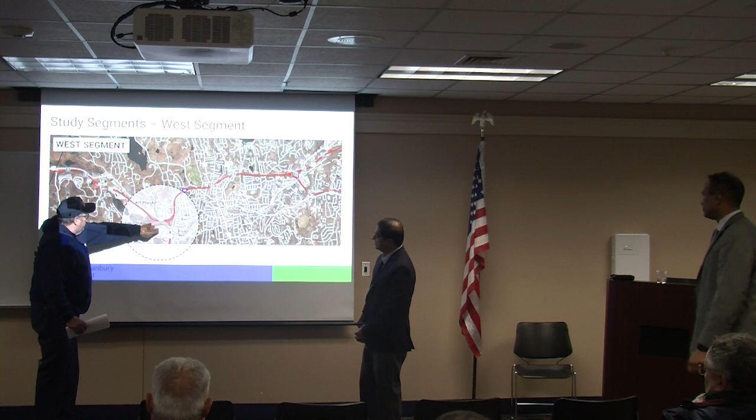That were going to Route 7 used to come down here, and like you said, where the mall used to be was the Danbury Fair Mall, which took all that traffic to the Danbury Fair. So I guess my question is, if you're going right now, wouldn't you take Route 7?

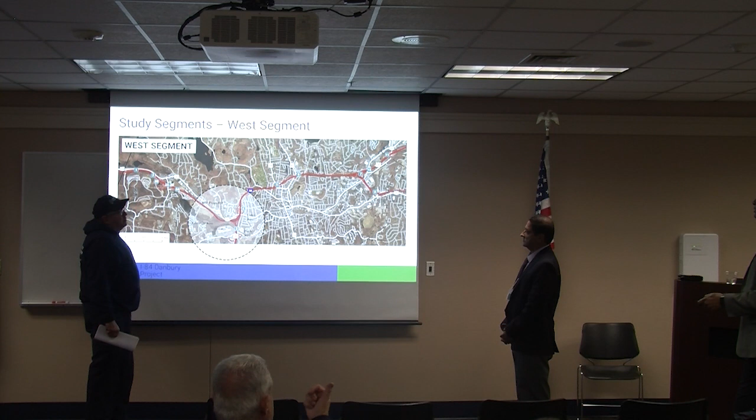People from New York State get off at exit 2 and come down Mill Plain Road, they go to Kenosia. They get off exit 2, come down Mill Plain Road, and they go across to Kenosia, and they make the right to go to the mall. They don't go to exit 3. They don't take this ramp, they take the other ramp and go to Kenosia quicker.

The back up, because of congestion. Everything's backed up, and it's horrendous. The traffic is backed up because at 4 o'clock, we found that when we did the studies, this area between 3 and 4 is so bad that it gets so congested that it backs up all the way to 2 and 1 sometimes.

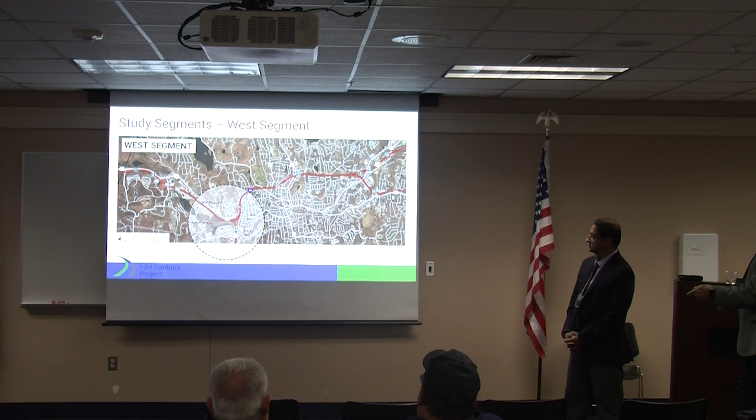People want to get off and stay out of traffic because of this backup from 4 and 3, so they go to Mill Plain. So when you redo this, there won't be traffic coming off at exit 2 from Mill Plain Road anymore, right? Exactly, that's the idea.

A lot of this, I can't promise you, but that's the idea.

A lot of the commuter traffic, it seemed in my experience—I used to live in Southbury, so I was taking 84 East in the evenings all the time—once you pass exit 5, it very quickly clears up, because it's much wider and people have a chance to change lanes before exit 7.

It's not really so much of an issue there, but there's a lot of traffic going to exit 5, probably because there's not an exit 6 ramp. So that backs up to exit 4, and then you have people crossing. That's why the section between 3 and 5 is the worst, but after you pass that, it's really fine.

You're absolutely right. One of the issues is 7 traffic that wants to get to Route 7 exit, between 3 and 5, they're making their move to get to the left side. At the same time, right around this area, exit 5 traffic is getting off, so they're crisscrossing each other—84 traffic trying to get to 5, 7 traffic trying to get to 7.

Once you go past Downs Street, this area gets relatively much easier because people know which lane they want to be on to get to 7. So hopefully that's why we looked at that right-hand ramp at exit 7, to keep those people on the right side so that crisscross doesn't happen at exit 5.